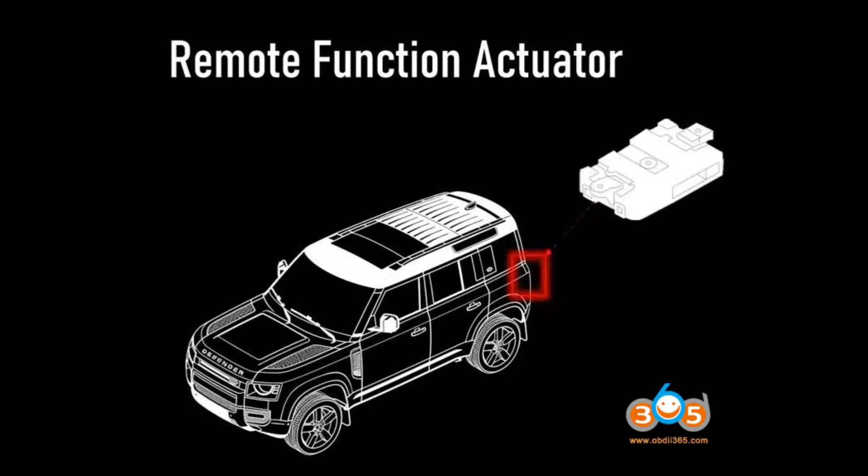A comprehensive guide to Land Rover and Jaguar key programming with Autel IM508/IM608, covering both OBD and bench programming.

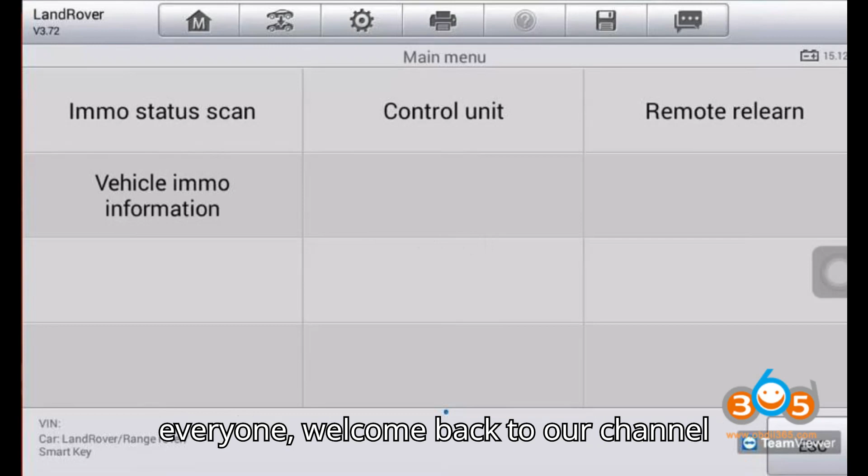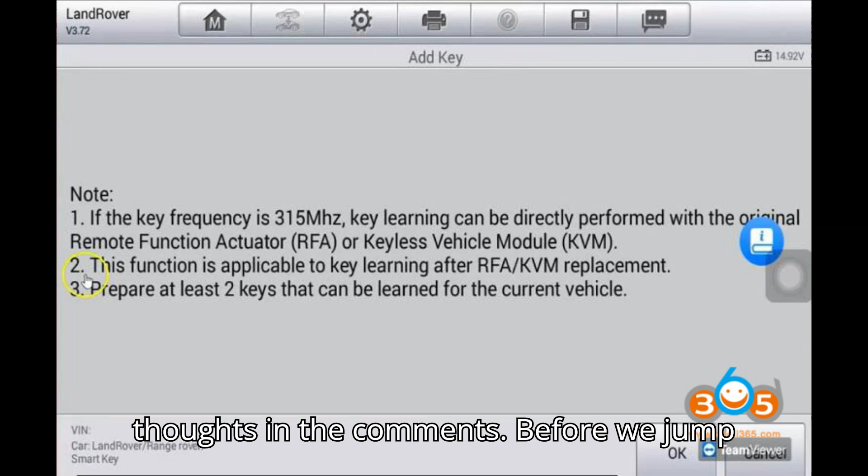Let's dive into a more detailed explanation of the procedures for adding a key to a Land Rover or Jaguar vehicle using the Autel IM508/IM608 tool, both via OBD and on the bench. Add key via OBD, example model: 2019 Range Rover.

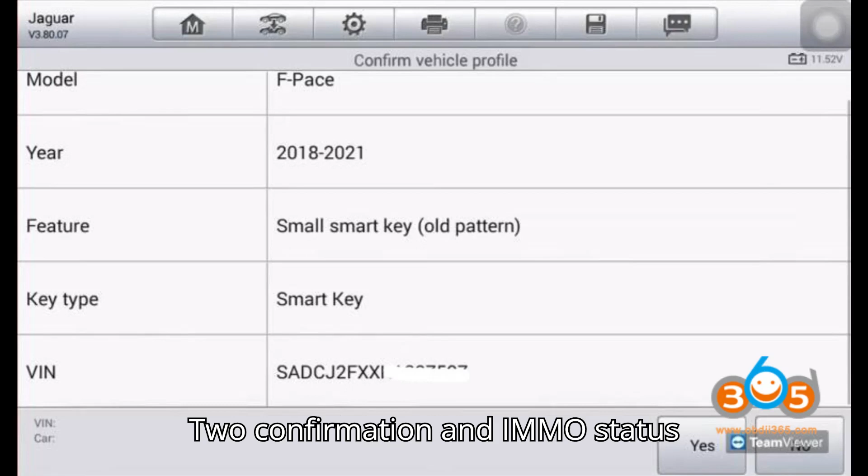1. Identification and selection: Use the Autel tool to identify the vehicle and select the appropriate options for the make, model, and year, 2019 Range Rover. 2. Confirmation and IMMO status scan: Confirm the vehicle profile and proceed to scan the IMMO status to understand the current key configuration.

3. RFA replacement and key addition: Select RFA replacement and then add key from the menu options provided by the Autel tool. 4. Follow prompts: Follow the prompts displayed on the tool's interface, which will guide you through the key programming process. Ensure to have at least 2 keys available for learning, as per the tool's requirements.

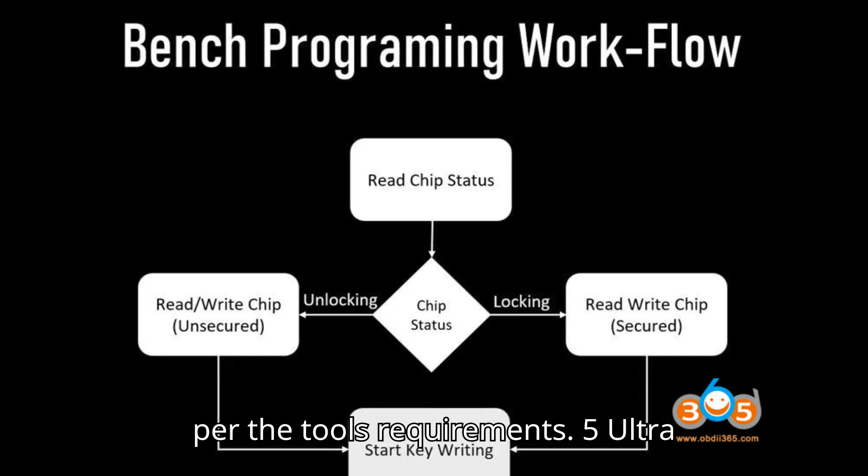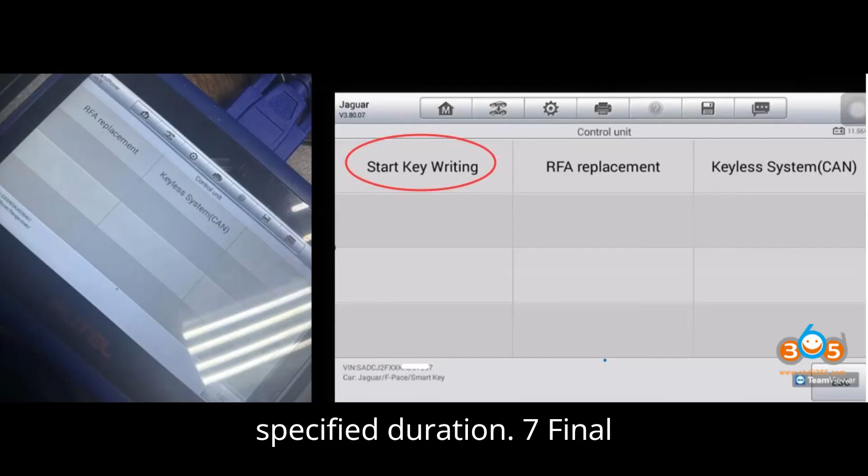5. Ultra-wideband UWB routine: If prompted, perform the UWB routine as part of the key learning process. 6. Key learning: Place the new smart key to be learned within range and follow the instructions to initiate the learning process. Repeat the process if the key is not detected initially, ensuring to press the unlock button firmly for the specified duration.

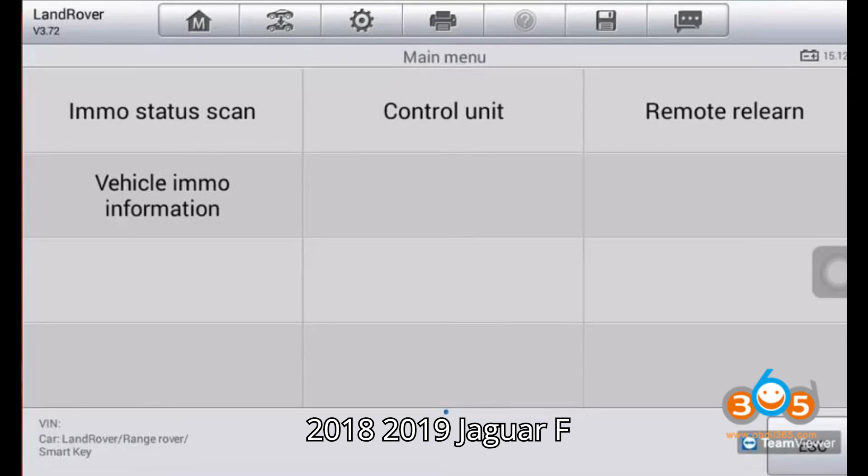7. Final verification: After successful key learning, ensure that all registered keys are functioning correctly by placing them near the gear selector lever or in the cup holder as instructed. Add key on bench, example model: 2018/2019 Jaguar F-Pace, with only 1 key.

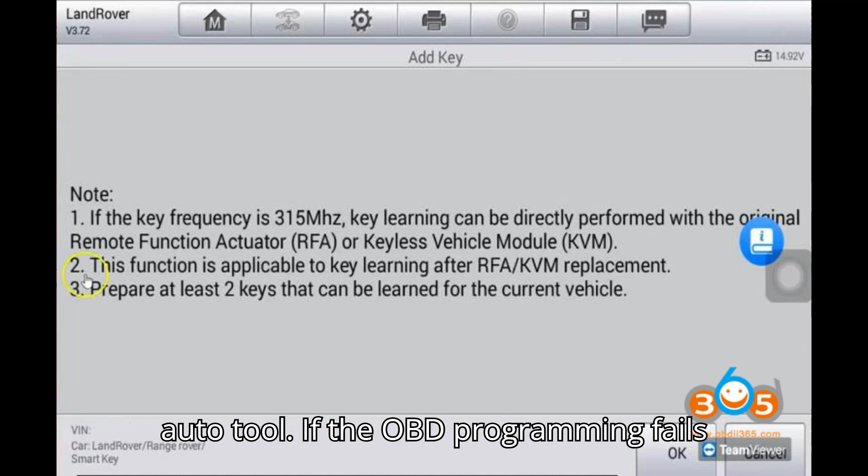1. Attempt OBD programming: Initially, attempt key programming via OBD using the Autel tool. If the OBD programming fails due to an unknown software version or other issues, proceed with bench programming. 2. Read chip status: Determine whether the chip in the key is locked or unlocked by reading its status using the Autel tool.

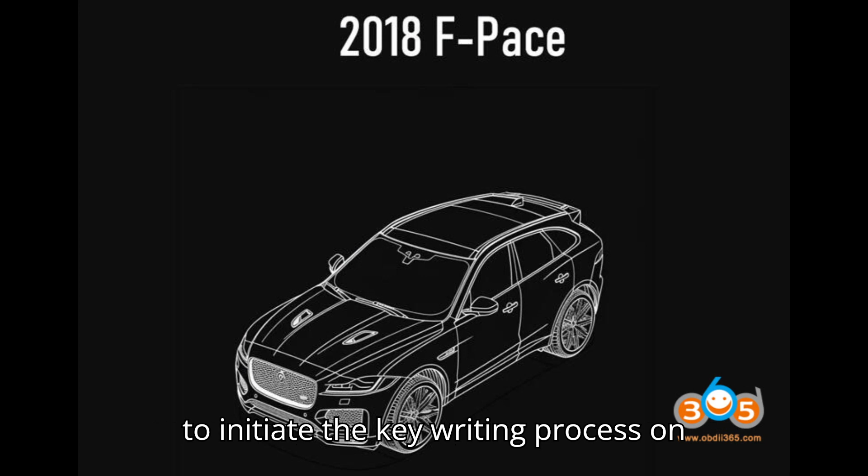3. Select programming mode: Based on the chip status, select the appropriate programming mode, secured or unsecured, for reading or writing the chip. 4. Start key writing procedure: Follow the instructions provided by the Autel tool, referencing wiring diagrams if necessary, to initiate the key writing process on the bench.

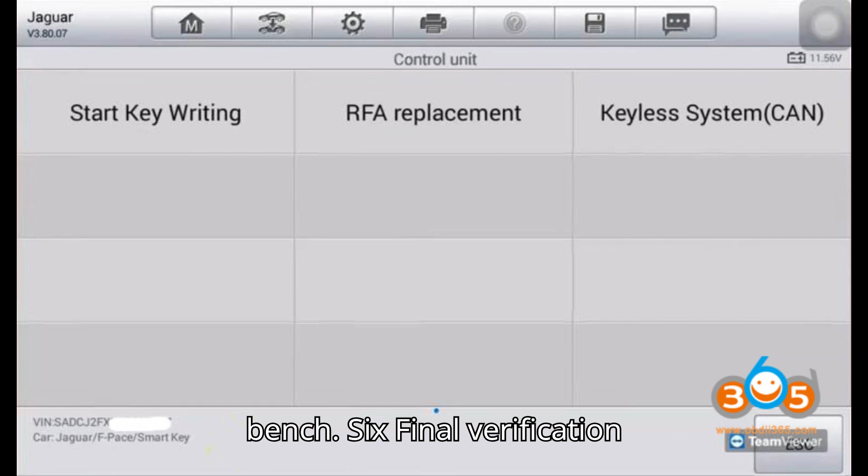5. Chip programming: Select the proper chip type and follow the step-by-step instructions provided by the Autel tool to program the key on the bench. 6. Final verification: After completing the key programming process, ensure to test the newly programmed key to confirm its functionality.

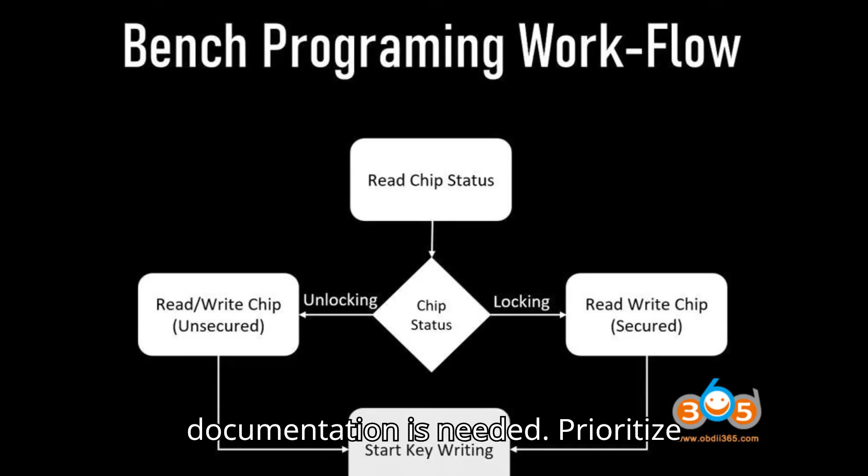Additional considerations: Throughout both procedures, it's crucial to meticulously follow the instructions provided by the Autel tool and refer to any wiring diagrams or additional documentation as needed. Prioritize safety and accuracy during the key programming process to avoid any potential issues or errors. If encountering difficulties or uncertainties during the programming process, consult the Autel tool's user manual or seek assistance from experienced technicians or support resources.